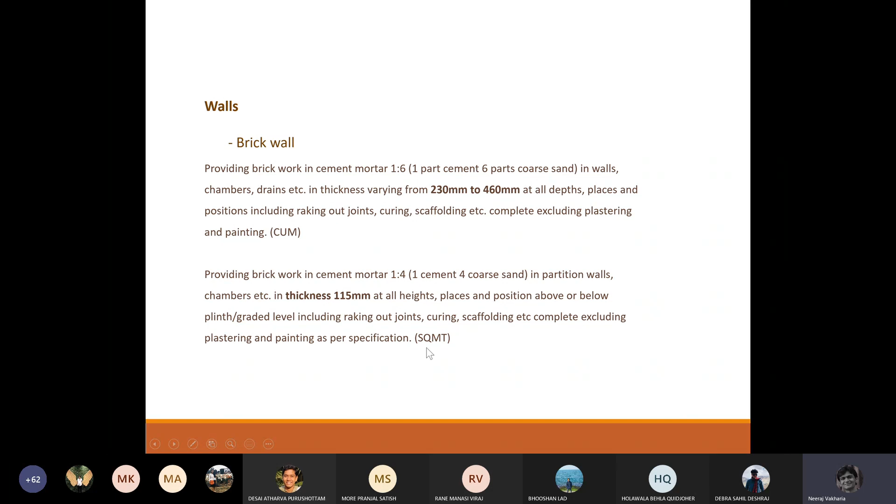So this is generally a 4-inch thick wall or 115 thick wall. 150 becomes a 6-inch thick wall, which is again in cubic meter. Only the 4-inch thick wall or 115 thick wall is considered in square meter. Generally, this wall is not load bearing or external. Generally, it is used for partition. And nowadays, for partitions we use other materials which are faster to erect, easier to finish and better in finish, right?

But still, if we consider its specification: providing brickwork in cement mortar 1:4 in partition walls, chambers, etc. of so and so, and that would be considered in square meter. Other specifications remain the same: raking out joints, curing, scaffolding if required. Again, without plaster and painting, because that we consider in finishes. So all the other walls will be considered in cubic meters. Just this 115 half brick thick wall will be considered in square meters. Is it clear to everyone?

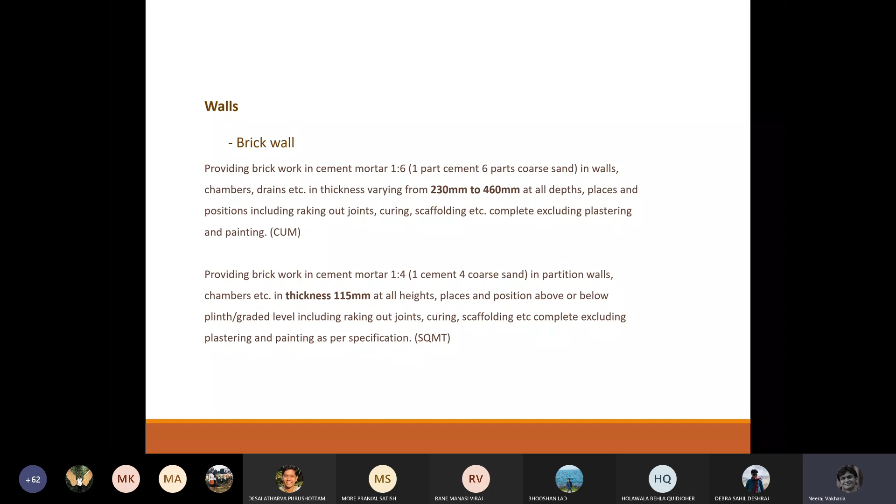So Neeraj, if we have both these walls, like a 230 wall for the exterior and 115 for the interior walls, we will have to mention it separately in the BOQ and the measurement sheet, right? Correct. In the abstract sheet, you will mention it separately, and in measurement it will come separately anyway because of the differentiation in thickness. So this is a brick wall.

Now we'll consider a stone wall. Many people are using stone walls, either as infill material or load bearing for the whole wall. When we consider a stone wall, I hope you all remember the types of masonry we do with stone. It might be random rubble masonry, generally done for unfinished compound walls, then coursed rubble masonry, and then ashlar masonry, in which you properly dress all the stone, use stone joinery, and then construct.

So here again, the specification requires you to find all these aspects, such as what kind of stone you are using, which will depend on your site and your availability.

Then what size you are going to use it as. Okay, if it is a random rubble masonry, then it won't matter. But if it's ashlar masonry or some particular sized blocks you are going to use, then you have to mention that as well. Okay.

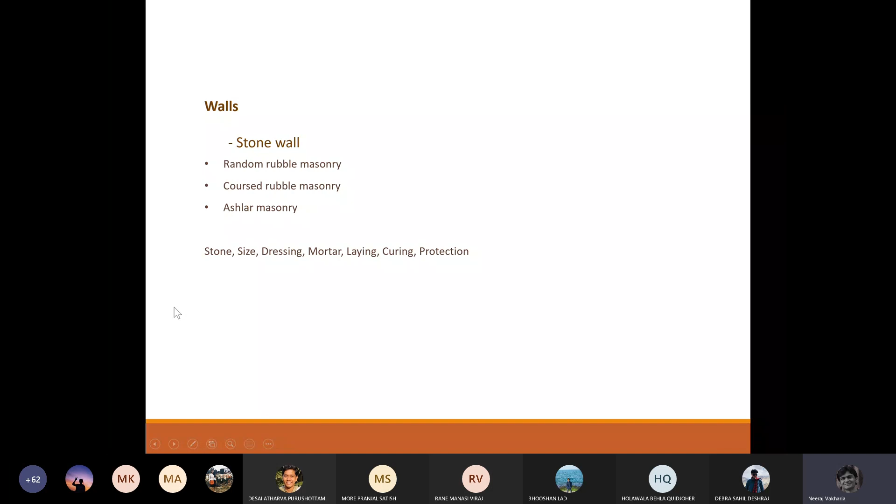Then comes the dressing. Now dressing means how the finish of it is going to look, because that again requires intensive labor on designing or creating the front surface, how it is going to look. We have chisels, we have hammer, and with all those equipments, we dress all the stones perfectly in a particular block. Okay, then how you're going to lay it, then again curing if required, and then protection if required. So all these elements should come in your specification when you're specifying stone method.

Okay, so if we have to write a specification for stone wall, we'll mention providing and laying 300 thick stonework. Now, this stonework may be ashlar masonry or random rubble masonry, for whatever purpose you are going to construct it. May it be compound wall, may it be the structural wall, may it be feature wall. That also can happen in stone. Okay, in superstructure with cement mortar 1:6, including pointing with cement mortar.

Now, what is pointing? Do you all know? Yeah, it is like treatment done to the end of the brick, like at the corner of the brick. Yeah, it may be done for bricks, it may be done for stone, any block, like a modular masonry block. Yeah, for whatever.

Because generally in brick construction, in conventional method, we generally cover it up with plaster and everything, so we don't need to do pointing. But when we are constructing, for example, stone masonry, we generally keep it exposed. In brick also, when we keep exposed brick walls, then we have to mention pointing with cement mortar or whatever it is. So basically, we are securing the joints, because joints are the most prone to water leakages. So not to keep them exposed, we generally use cement mortar again to cover it up.

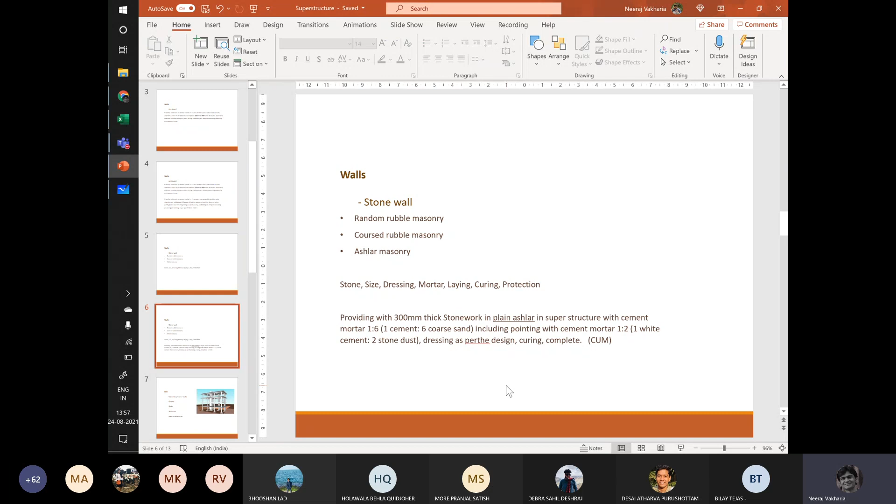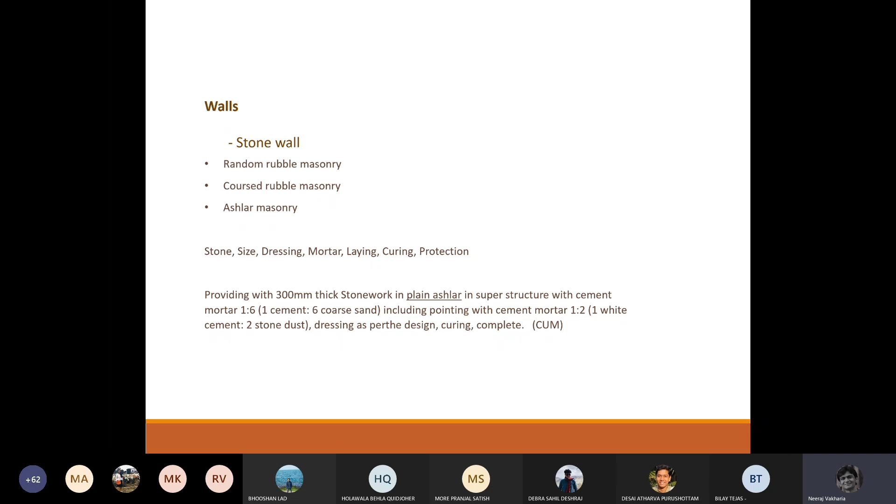So many of you might have lifts or staircases, or maybe the whole frame structure constructed out of RCC. That also you have to calculate, which you partially did for foundation, for the stub columns and all. It's similar, but here all elements you have to keep in mind: columns and shear walls, so all the vertical members, beams, slabs, staircases or lift shafts, and precast elements, if there are any.

Now, precast will be calculated a bit differently, not as per what we do for RCC, but rest of the elements will be considered in RCC. Now, we'll see how to do it. Again, this you all know.

Okay. So again here, what all elements we have to mention. So first of all, we have to mention the strength or the grade of concrete. Okay. The process is same for specification. So which type of concrete you are going to use, how you are going to use, and how the finish is going to be.

Okay. So providing and laying in position specified grade of reinforced cement concrete. For foundation, it will be different. For column beams, it would be different. For pardi wall, which is not a structural member, it might be something different. For a parapet wall or something, if we are constructing, it would be different. Okay, if required. So that you have to keep in mind.

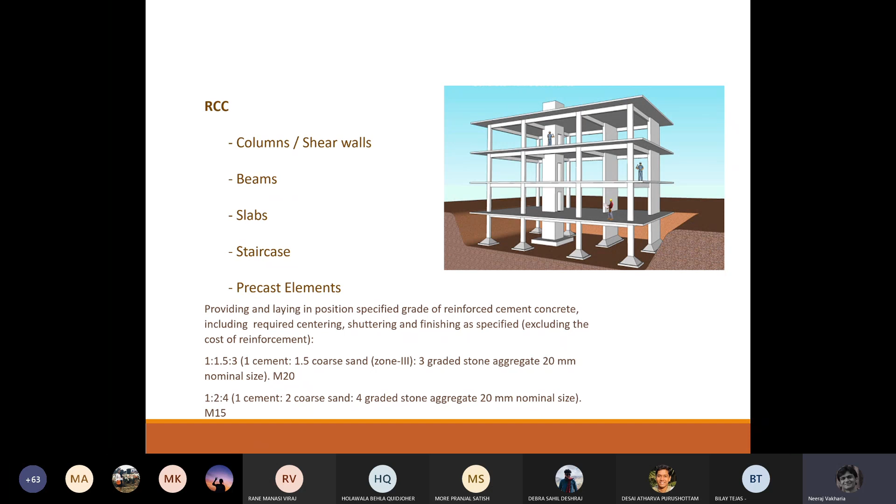So this specification you will apply, and then when you are calculating in the measurement sheet, this specification will come in the abstract sheet or BOQ sheet, as we call it. So in the measurement sheet, you will mention all the columns. If I am writing it in Excel, if this is my measurement sheet, considering all columns, I'll write my column numbers.

The more detailed you make it, the better for you to correct or recheck it. Because even if one column or one item changes, you have to correct all the BOQ sheets and measurements. So it's better to make it neat and clean and clear, so that you can understand all the items. So here you can write C1, C2, whatever columns there are. If the column size is same, you can write directly three of C1 and C2 columns, whatever the size is, 0.5, 0.5 and 3 meters, and then the total volume.

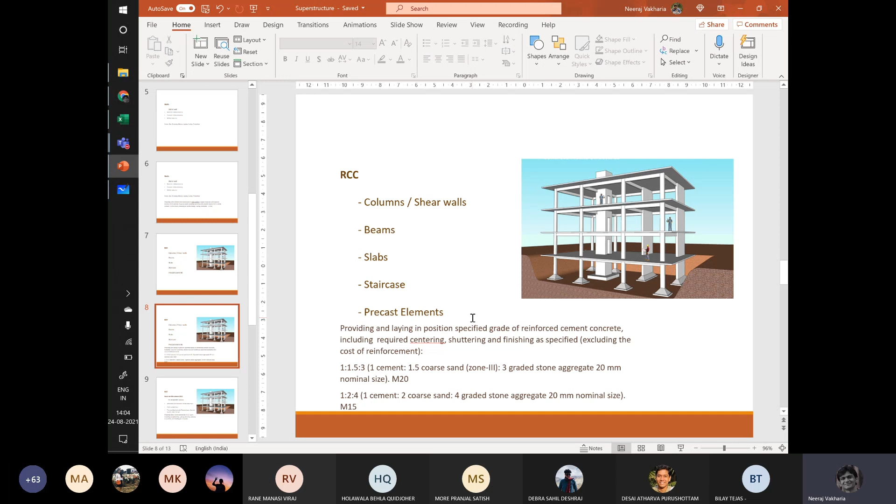Then you will have some other type of column with a different size. Then you will have beams, then slabs. All the volumes you will calculate, and it will give you the volume for RCC, the cement concrete volume which you want to have. After that, again here, keep in mind, I have written excluding the cost of reinforcement, because that is calculated separately. It is very costly.

Even if the volume is less, still the cost of it is a major thing when we are calculating BOQ, which is steel reinforcement. So steel reinforcement, when we are calculating it, of course it would be pretty difficult to calculate all the bars which are there in the whole structure.

Because here we also include stirrups, we also consider binders, we also consider main reinforcement. All of it is being considered here. So to calculate the volume by calculating bars, it would be pretty difficult and messy for us to work with. So what we generally consider is 5% of total RCC volume.

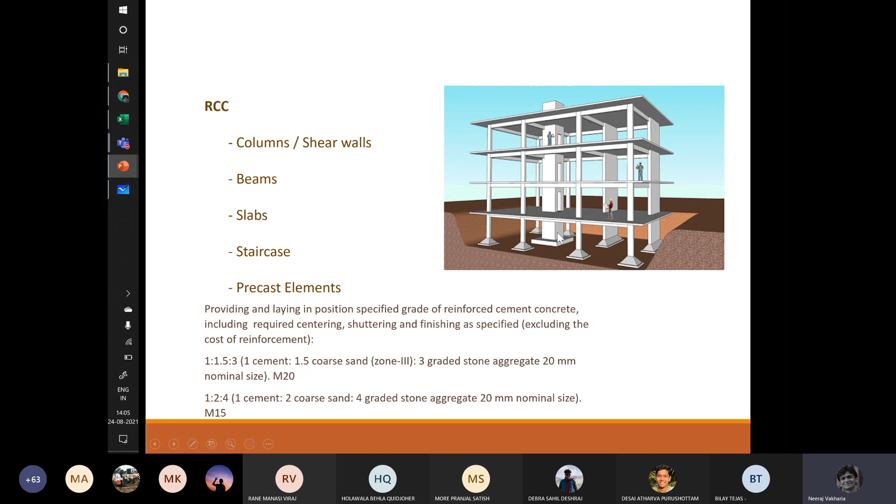So whatever we calculate for RCC here, all the beam sizes, column sizes, slabs, shear walls or lift shaft walls, foundation, everything, we'll consider 5% of that volume to be steel reinforcement. Is it clear to everyone? You have to mention it. So guys, please keep this in mind. If you are not clear, do ask me, not an issue.

So we consider 5% of total RCC volume as steel reinforcement or steel bars which we are going to use. Now, generally there are three types of steel bars available in the market. The first one being mild steel or medium tensile steel bars. These are generally not used for reinforcement in RCC. They might be used as a supportive member, but not as the main reinforcement.

Then there come the cold twisted bars. But now, recently, though it has also been a while, we generally get TMT bars. You must have heard that in construction they use the term TMT bars, TMT reinforcement bars. They are thermomechanically treated bars.

Even the torsion on the bar or the threads, the uneven surface for friction which they have created, is specifically designed, and the bars are treated thermomechanically to get the required strength. So I hope you all remember, while calculating numericals for TOS, we generally use the terms FE415, FE500, and take the strength data from the steel table to solve the sums. So basically we are focusing on the strength when we talk about the gradation: FE415, FE500, 550.

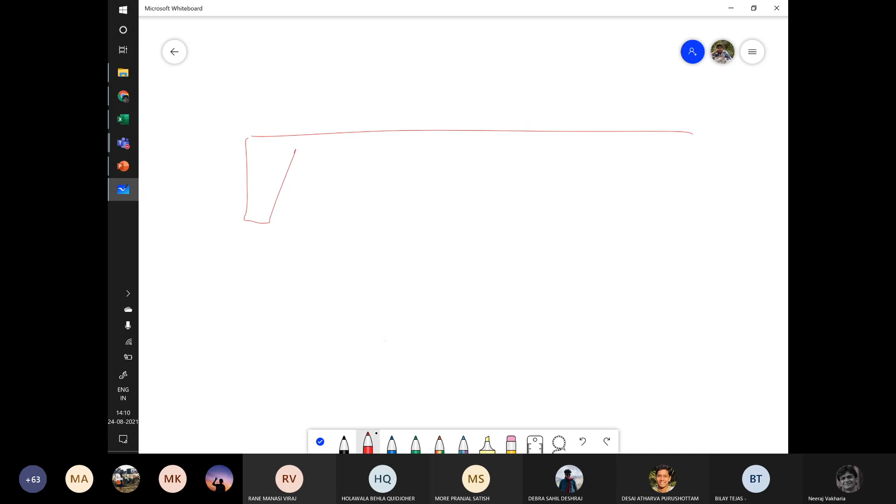You have ribs over here. Now, basically, you just have to calculate the volume. So you tell me, what do you think we should do to calculate the volume of RCC here?

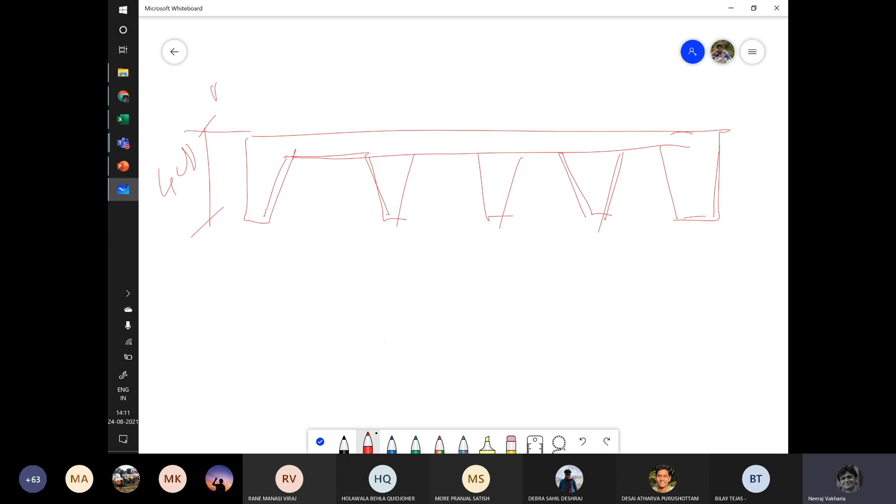Probably we can take the entire depth till the rib and then subtract these small cuboids. Yeah, that is one way. But again, to consider a 3D trapezoid and to calculate its volume, what you can do is, as you said, you will consider the whole depth. Let's say it's 400 and this is 10,000 mm. You will calculate the whole volume by 10,000 by 10,000, and you will calculate volume for one block,

and you will deduct. You can count the numbers, how many waffles you have or how many voids you have, right? Yes. And you can reduce it. It's done. It's that simple. You should know all the areas for the geometric shapes. If you have a fancy shape or some different shapes, then that just you have to consider. Otherwise, it's all simple. Okay. Oh, yes, thank you.

Neeraj, what if we have a tapering portal frame? Portal frame. Okay. So if it's tapered along one axis and if it's simple, like it's only tapered on the inside, let's say, if I take this cross section, you have RCC portal frames. Yes. So what you can do is, in section, whatever the shape it might have, you calculate area for that and you consider the whole length and multiply with it. You will get a volume.

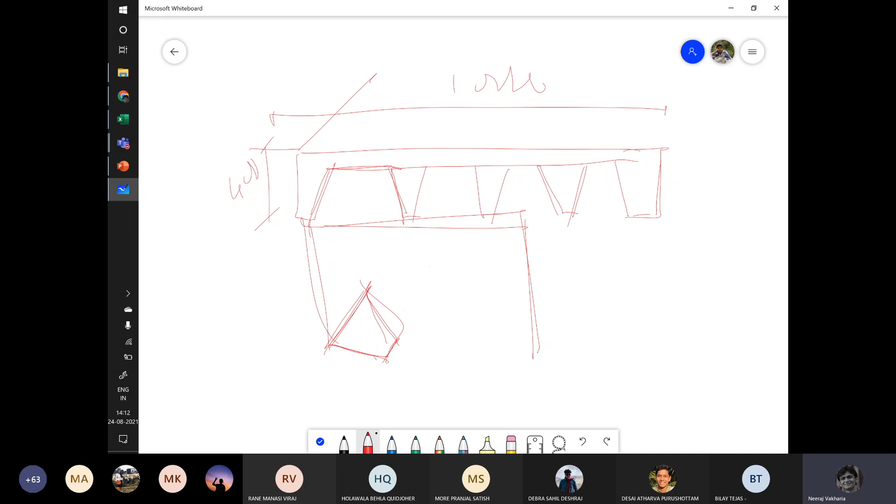So the two sides we consider with the trapezoidal area, and then the top of it we calculate differently? Yeah, if the cross section is the same throughout the three sides, then you can directly calculate the center line of it and multiply with it. Let's say this cross section area is coming about 0.02 meters square, into the length. This is going till 8 meters, this is 15 meters, this is again 8 meters. So I'll multiply that and I'll get a volume. You get it? Okay, thank you.

And if someone has a pretty complicated frame or something, they can also use new softwares. You might be using Revit, you might be using SketchUp, right? There also, if you have a proper clean block, you can directly derive the volume for it. I hope some of you might know it. If it's a pretty complex shape, then you can directly derive your volume from those softwares as well, if it's a complex portal frame or something. So yeah, do calculate it on your own.

See, thoda plus minus hoga. We'll see, we will be able to know. But again, you don't have to write everything. You can just measure for one portal frame and then write that I have four of these kind of portal frames. So four into the same volume, and you can directly get the volume for all the portal frames.

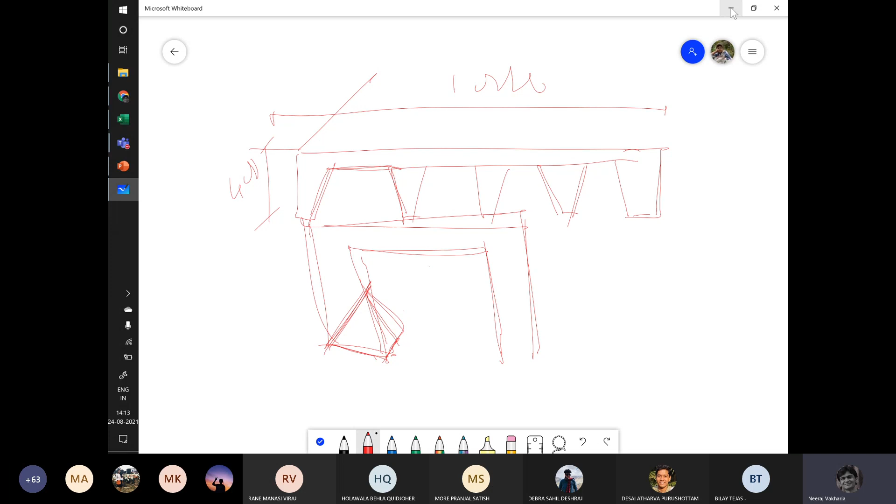Okay. Anyone else? Yeah, Neeraj, the reinforced one, then do we add in the end with the columns ka volume also? No need to add. We are separating all the items. So generally, when you are calculating steel reinforcement, the column or RCC ka volume will stay as is what you have calculated, and this would be an add-on. You will write it separately: steel reinforcement for the same volume of RCC would be this much.

Now, if you consider the whole volume, 100% ka 5% in terms of volume, it's too less. So when we are calculating, considering let's say 95% of concrete, usme it won't matter this much quantity. I hope you're getting it. Yeah. So you can write it separately, steel reinforcement. First you calculate all the RCC volume and then steel reinforcement 5% of what you have calculated. That's it. Okay. Thank you.

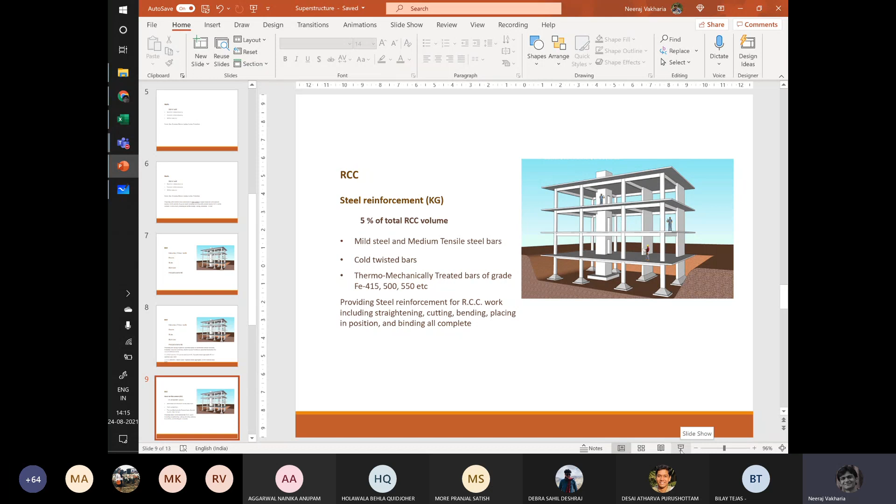So this is regarding RCC. Now the material comes with steel. Some of you might be having this also. See, again, no one is going to have a complete building made out of RCC or a complete building made out of stone or wood or steel. Might be some parts which are used with steel, some parts which are being constructed with timber, and it would be a hybrid structure to some extent.

Now, these members which I'm mentioning are not just for the main structural framework. It might be some other portion. For example, I'm constructing the whole building in RCC frame structure, but just the entrance portal I'm making in load-bearing stone wall to give it a particular look, or the porch I'm making in steel. So all those components you have to find.

You have to find the material and calculate it accordingly. Even the railing, let's say railing. Now we are talking about steel and metal and everything, but we are not talking about the railing per se because it is not a structural member. But yeah, if the railing comes, then that will be calculated as metal. If a wooden railing or wooden balusters or something for the handrail come, then you will calculate that in timber. I hope you get it.

Okay, wherever the material comes, you have to keep your eye open in your own structure. If you haven't considered it, calculate it and keep that in your mind so that when it comes to the item or the material, you mention it. Okay. So here comes steel.

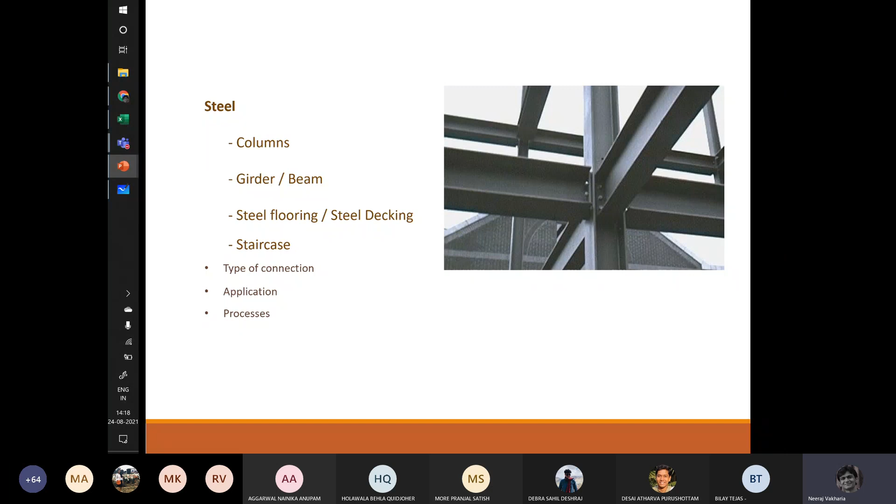Steel is prone to corrosion. It is prone to fire compared to concrete and brick and stone. So there are some processes which we do over these members that will protect it. All those things have to be mentioned when we specify for steel. Okay. So, Asha, the thing you have to keep in mind is steel is a very costly material, may it be steel or any metal.

There is AC piping, which is done in copper. There is GI construction, GI railing, staircase. All AC ducting which we do is done in aluminum. So the quantity might be pretty less, but that's why we measure all the metal components in weight, in kg. Okay, so you have to keep that in mind.

So now when we are talking about the steel work, we have to mention providing structural steel work. Structural steel work I have specifically mentioned because it will be used for structure, I mean, to create your framework. So your portal frames and all those things will also come in this: providing structural steel portal frame, might be riveted or bolted or welded

in built up sections. Now, built up sections means the ready-made sections which you get. There are I sections, H sections, C sections, all those things. Whatever it is, you have to mention it in built up I sections, or generally we also mention, I hope you know a steel table, ISMB, ISLB, and those terms. Indian Standard mild steel section, whatever it is, we mention that particular one.

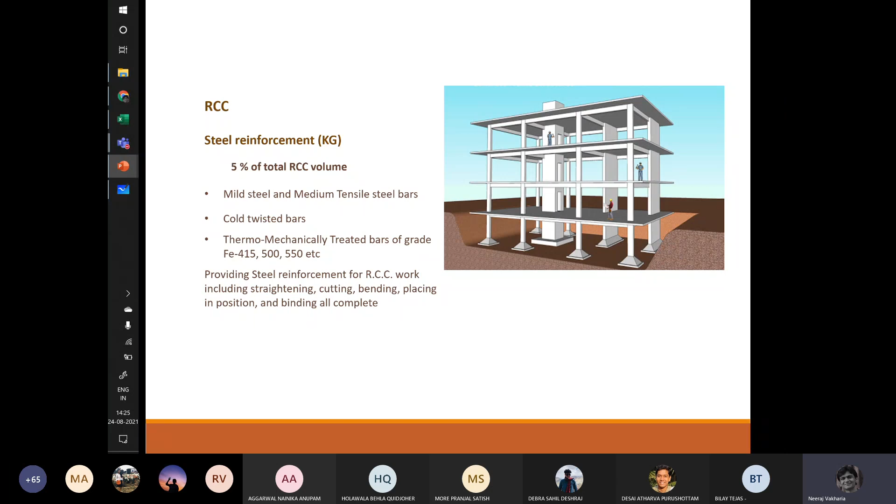We calculate a different item, PCC, just plain cement concrete. We don't have reinforcement inside. When we are calculating RCC also, we are technically just considering cement concrete. Reinforcement we consider as a separate item. So it would be separate. Out of that square or circle, you can deduct the cross section of steel which you are encasing, and that would be your quantity.

Okay. So we would mention it earlier only? Yeah, when we are talking about the concrete, there you can mention that this concrete is for RCC column and beam, this concrete is for plastering work, this concrete is for encasing and so on. But if the grade is the same, then the quantity will be summed up. If the grade of the concrete is the same, that means you are using cement, sand and aggregate in the same amount, so the cost would be the same.

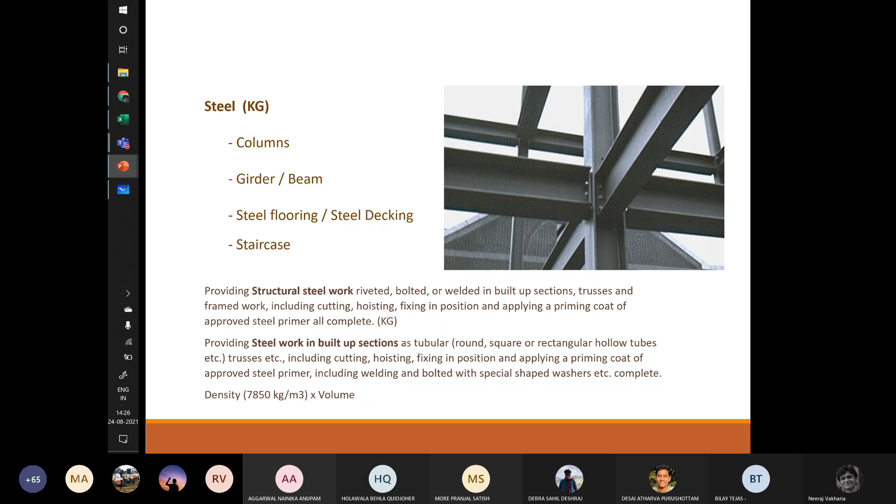Thank you. Any other questions regarding steel? Okay, if not, then we can go ahead to the last element or material, which is timber. Okay, now timber again,

might not be used for the structural member, but we do use it for frames or windows. Again, I'm talking about timber and not engineered wood or plywood or any of those. This is just plain timber, structural wood we are talking about, which we use for columns, joists, truss, beam, rafter, purlins. We may also use it for flooring or floor panels.

Again, wood and not engineered wood. If it is engineered wood, then we have to mention it separately. This is for structural wood. Then there might be staircase or handrails or railing. As you can see, the whole building could be out of it, even window frames, door frames, all those things. If we are using timber, then we have to consider it here.

So, again, when we are talking about timber, you have to keep in mind that timber we calculate in volume. I haven't written it, I forgot to write it. This we calculate in volume. Whenever you go to the market to purchase wooden frames or wooden rafters or something, they will give you price based on volume.

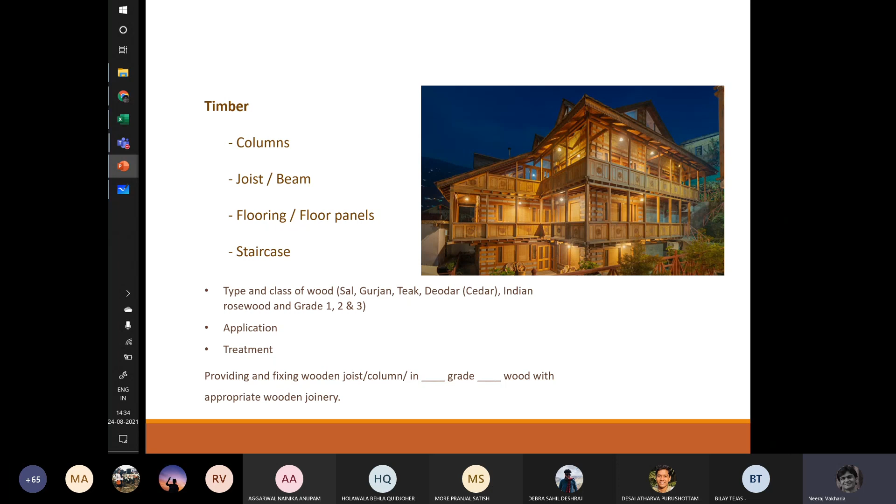And since we are talking about the superstructure, the last item I want to tell you about is wall plaster, which is very general; there are other finishes also which we apply on walls, internal and external. Since we are covering this, this is the last item. I hope you all know: providing and applying average 12 mm thickness. Whenever we apply plaster inside, we apply 12 mm because that is enough.

But when we are applying it on the external side, it is 18 mm to protect against dust, water, rains, etc. So that's why 12 mm internal single coat plaster. If we are applying 18 mm or 25 mm plaster, then we have to apply it in multiple coats. We generally can't apply such a thick plaster in one shot.

People do it on site. We have to check whenever we visit site. The contractor just wants to finish the work, so he'll do it haphazardly. So we have to observe it and keep that in mind.

So providing and applying 12 mm thick single coat plaster in cement sand mortar, so and so, for all plain and curved surfaces of brick or block or RCC walls, and finishing the same in correct line, level and plumb. Otherwise the whole wall inside will become crooked. So again, the plastering and leveling has to be done correctly.

Making of edges, corners, sills, jambs, soffits. I hope you all know all these terms which you might have done in first year. Pattas, etc. as per the drawing; sometimes we have designs on the plaster. So we also have to mention that they have to check the drawings and relevant specification, including all necessary surface preparation.

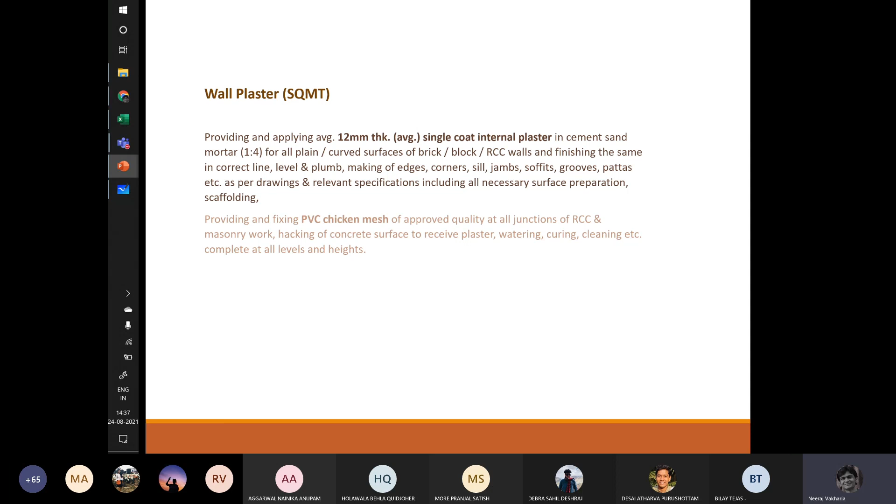It's something like that only, over which we plaster it so that it doesn't leave cracks. It doesn't let the cracks occur when it's curing. Okay. So just to mention it, no need to include this in your BOQ, but wall plaster, yeah. Okay. So this covers your major items of superstructure.

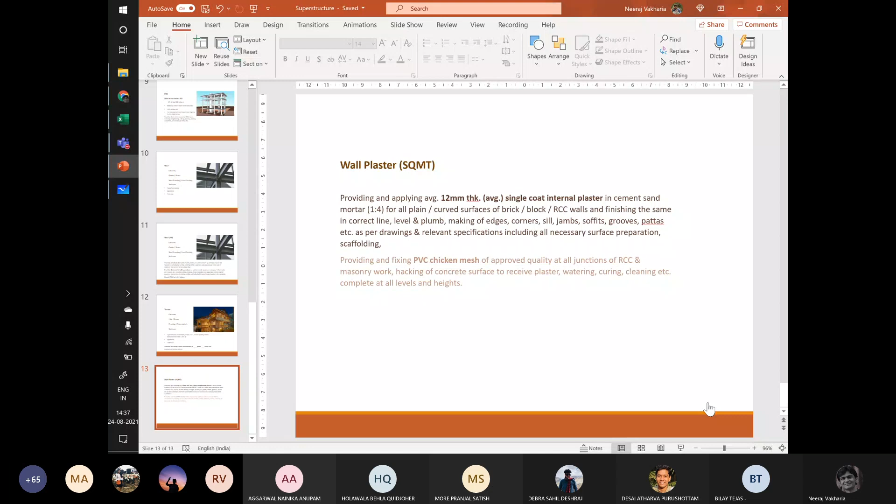Still, if someone thinks that they haven't understood, or there's a particular item which they don't know how to calculate, you can ask me right now. Hello. Is it clear to everyone? I had a doubt. I think Shravan has a question. Yeah, sure. So,

What specification do we write in case we're using a double skin facade of glass? Double skin facade. Now, what material are you using? Glass. So glass is another type of facade. For that, you will be calculating it as what is called curtain walling, right? Glazing, which you're going to use. Okay, so you are going to use sandwich glass or something like that. Yeah, I mean that only, but it won't be completely that. There will be steel members which will come in between, right? Yeah, it will be.

But see, if you're thinking of steel members which are supporting that glass, generally when you're applying curtain glazing, those are aluminum mullions and transoms which you use. So the whole assembly with the glass will be considered in curtain glazing or curtain walling, and it will be calculated in square meters, the surface area, like height and width. That would be a different specification. And if the structural member is supporting your slab and beam and everything, then that will be considered as steel, what we just talked about.

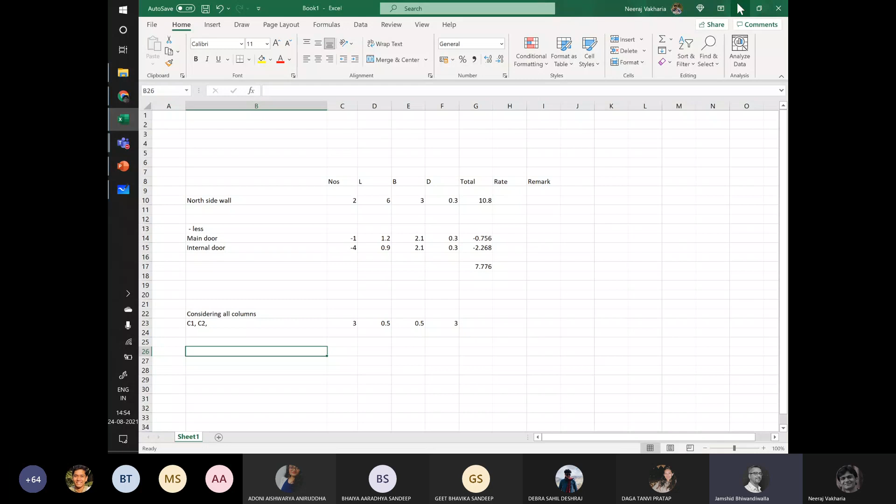There are a couple of people who are applying the formula in Excel, and some are still doing it manually by calculator. So if that is the case, there can be a request where we can show you how the Excel formula can be used. The CRs and the class can get to us. If not, YouTube channels or something can always help you to know how various formulas are to be applied.

Yeah. Beyond that, I would like to know from the CRs, can we expect a presentation on the fenestrations tomorrow morning? Hello? Yeah, hi Jimmy. So does it have to be just a slideshow kind of thing where we swiftly pass all the photos, or how? Someone has to talk about it. Yeah, that is true. It can be a slideshow, segregated building wise.

Not all buildings, maybe 5 or 6 buildings: the CEPT library, the CEPT main building, maybe IIM old, IIM new, AMA, a set of 8-10 good buildings. If you are able to compile the photographs and have a good set, then you compile them in a certain order. So someone can sit and organize them well, and then a couple of you can decide who is good at talking, and quickly run through them.

This can be good for the visual refresh of memory for one and all. Perhaps people like me, who have been to Ahmedabad so many times, can then further comment and talk about the finer details. It will be a good exercise such that people who are to make schedules know what quality of fenestrations is expected. So can that happen, Sahil, by any chance?